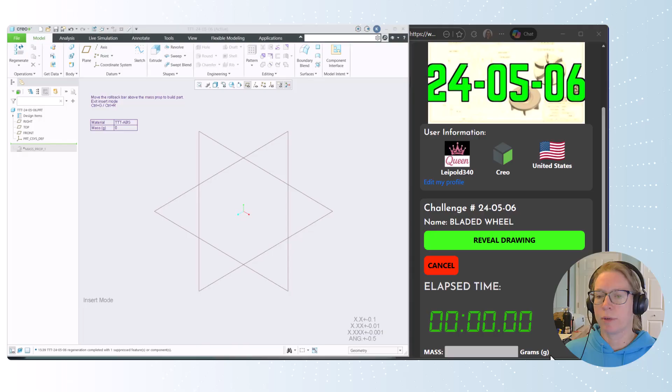All right, good afternoon, and we are here for another Too Tall Toby sample problem. This one is a level 3. We're going to have a pattern. I'm also going to try bringing in a palette sketch that I created, so we'll take a look at that. We are in grams. Let's jump in.

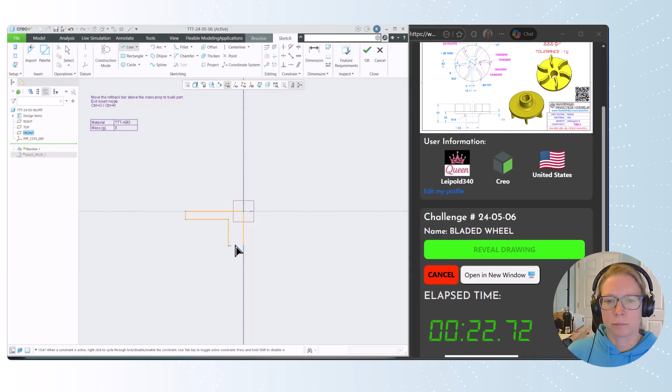I always love a good revolve, so actually let's start this with a revolve. So with revolves, we have to have our center line. I'm going to make the hole separate from this revolve, but my full diameter here is 180. And the thickness here is 11. Lower diameter is 65. And this depth is 55.

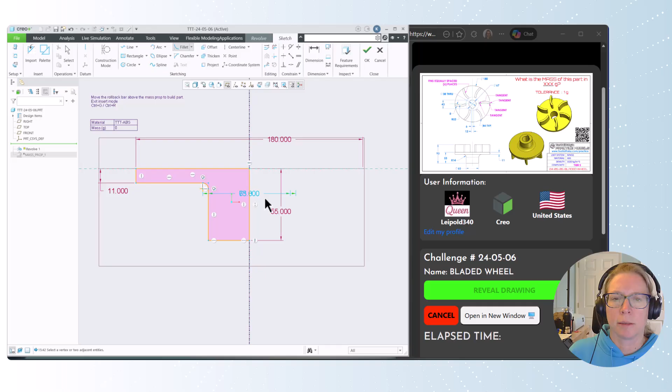So remember, we can't just do this as two rectangles. We've got to have one continuous line on the center for this revolve to work. Oh, let's grab a fillet. Let's click right there and drop a fillet in. And, oh, interesting. Not how I would have dimensioned that. So let's fix it. And that's going to be a radius of 14. We are left with a 65. That's okay.

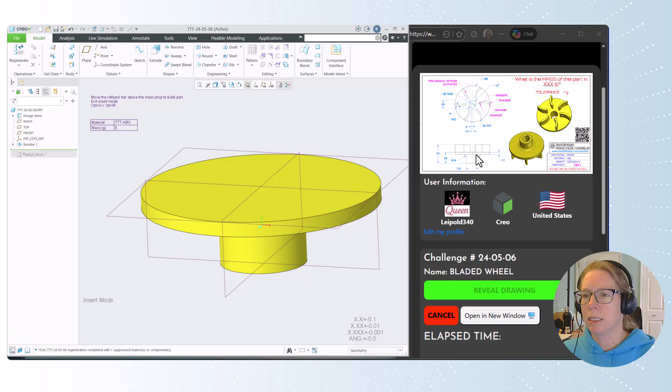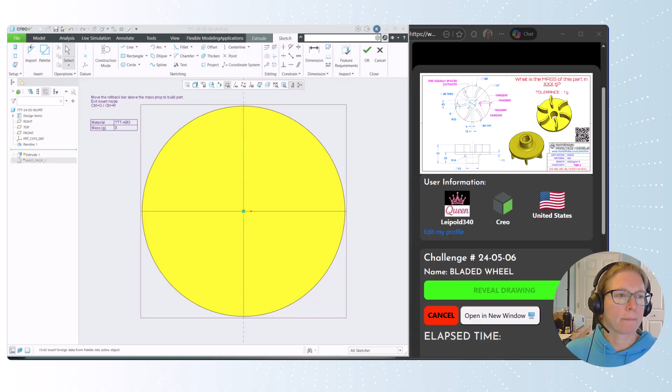All right, so we've got most of our geometry. Let's get those blades on there. So if I look at this from the top, we're going to have an extrude. So let's see what we got in the palette. This racetrack seems like it's going to work for us. So let's drop that in. Let's rotate it. It says that it is going to be tangent to the horizontal, so that's a little different.

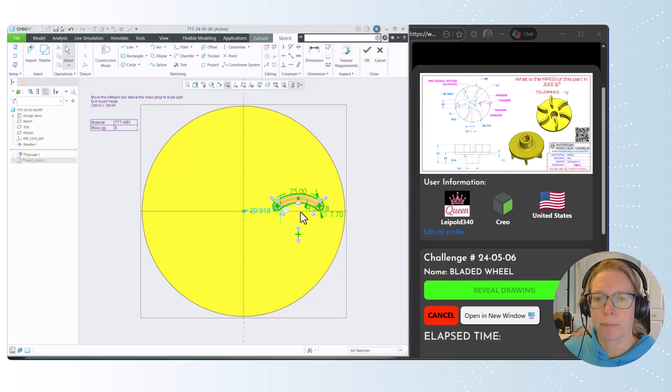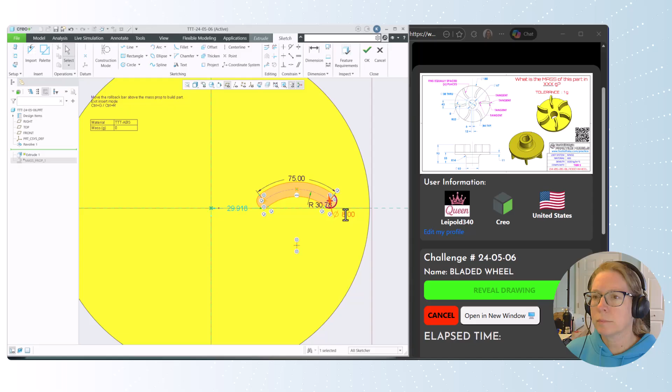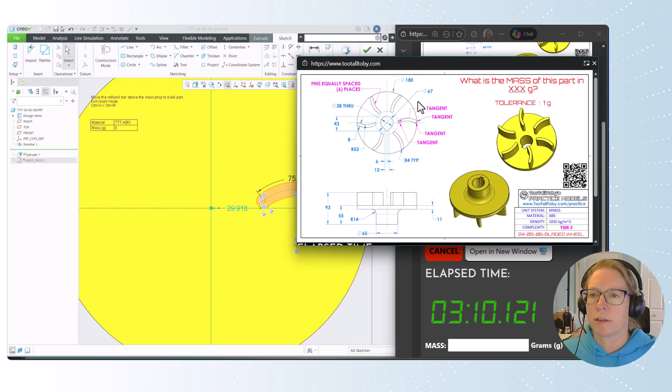Let's see what we can get for our dimensions here. Let's make it tangent here and here. Okay. And we've got our thickness of 8, so that's equivalent to our diameter. I need to zoom in on this a bit. There we go. All right, so the smaller radius is 52. And it hits this diameter of 67. Perfect. We'll slide that over here for now.

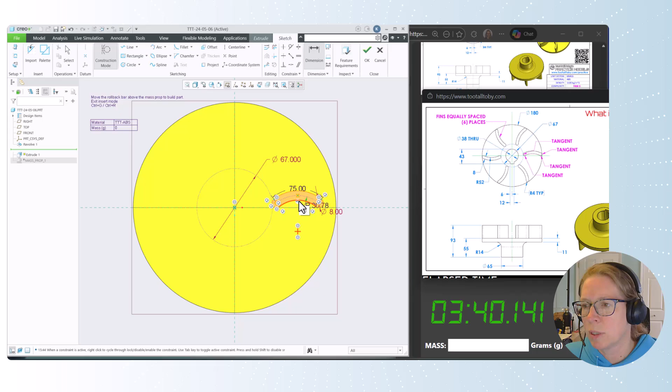So let's get a construction circle. It's tangent. And let's give that a dimension. I'll switch that to a diameter, and that is 67. All right, the other dimension we have is the smaller radius. So we're going to get rid of this one. Smaller radius is 52.

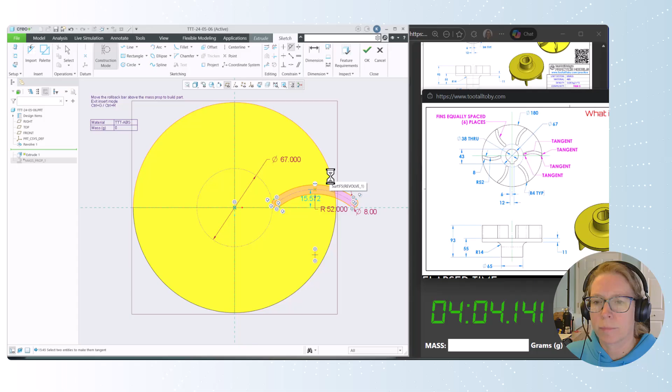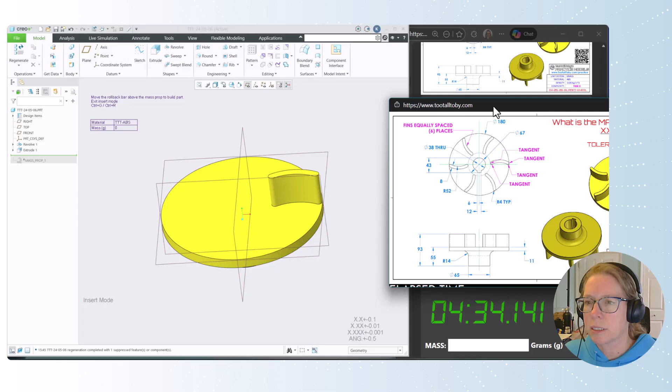Oh, and our last dimension, we're going to get rid of this 75. We're going to make this tangent to the outside. All right, let's see if we can manually drag that in. That'll help. All right. So let's extrude that. And the height of this is going to be 93 minus 55. Okay. I don't see any rounds around that or anything. We'll just do the thickness of 6.

So we're going to grab that extrude, pattern that. Let's go around the axis and select the center line that came from our extrude. Angular extent is the way to go, and we are going to have 6 of those.

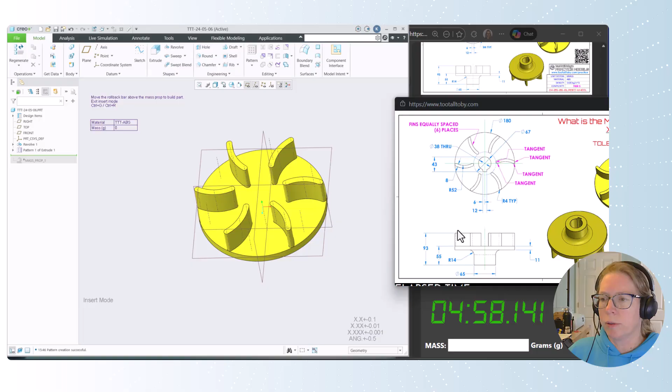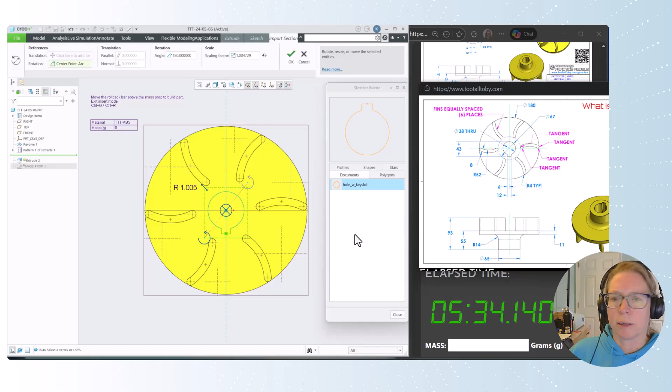All right, so the last thing to do is drop the hole in. And for this hole, I realize that this is a good hole size, and it's something that I might use frequently. So I created a generic hole with a key slot and saved it into my working directory. So technically, based on how it's showing up there, we're going to go upside down. Okay. Put that at the center. All right, let's get some dimensions going here. That looks like it's in the right place.

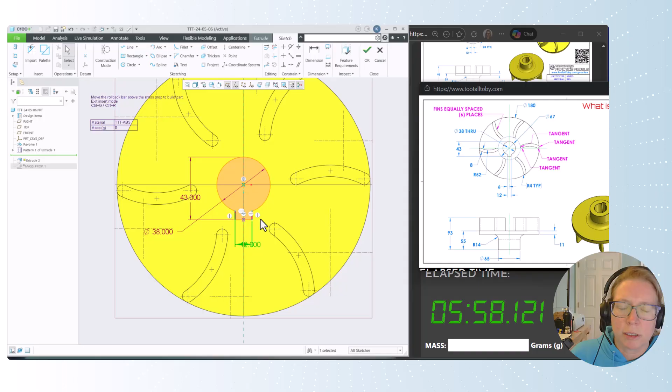So my diameter is 38. My overall height top to bottom is 43. And the width of the slot is 8. So you could do that with a rectangle and a circle. Just make sure that it's symmetric across there. But if you have a sketch that you feel like you're going to use over and over again, all you have to do is hit save while you're in the sketch mode. That'll save the sketch. Just save it in your working directory and it'll pop right up in your palette next time you need to use it.

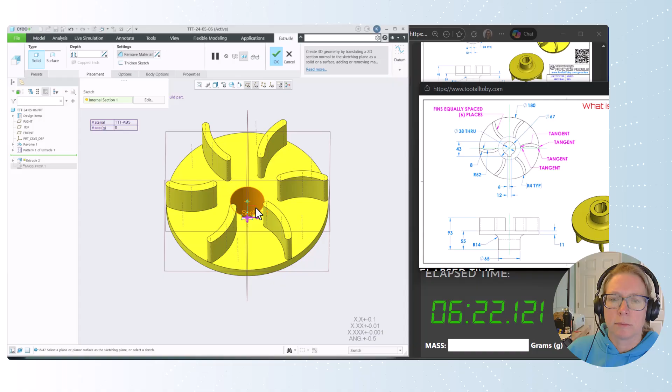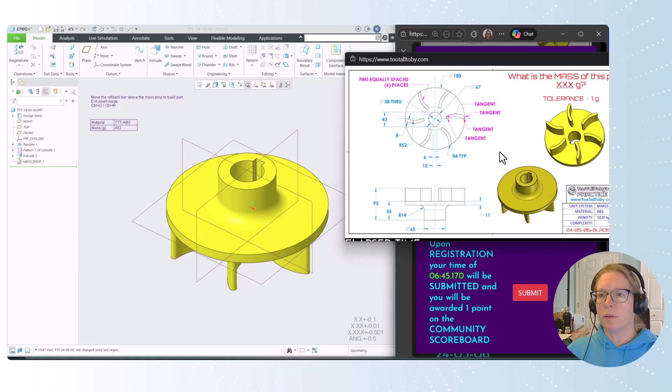All right, so we are going to go through all, removing material. Let's see, how are we looking? I think that's looking pretty good. Looks a lot like what we got. Let's see how we did. Let's try it. Beautiful. All right, so we can close this. So nice part, used a revolve, although it could have been extrudes. Nice big radius there. Let's get that hiding.

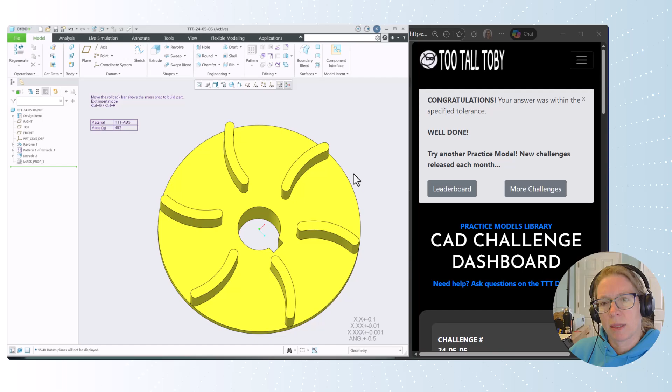So in this case, first time I've used this, but I had my own sketch that I saved into the palette and brought in. For this geometry, let's go back and talk about that one for a second. Right, so I used from the palette tool the arched racetrack with axes. So another way you could do that might be to make some geometry like that. And then with that geometry selected, can we offset that? That only does one side.

So without using the rounded racetrack, honestly, this would be a little bit more challenging. The geometry is pretty straightforward in Onshape. It's called slot, and you would sketch essentially this arc and put a slot around it. We don't have specifically a slot. I was hoping to use thicken, but that's not available. Could offset to either side. You could have the arc and then the circles at both ends, and then use the line tangent option.

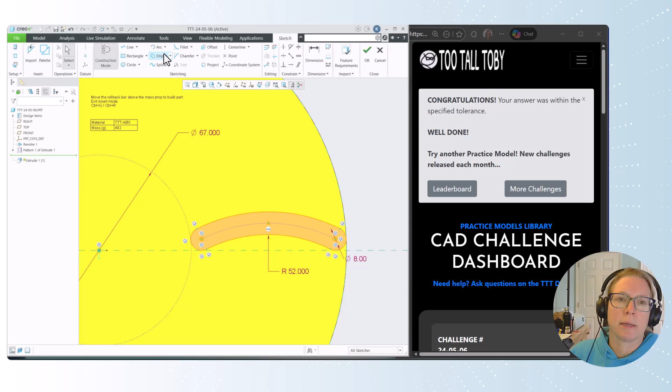No, we don't want that. Sorry. Don't even want 3 tangent. You could probably just do a 3-point tangent arc on the inside and the outside and do a lot of trimming. So that palette tool can really be a big help when you find yourself facing some common geometry, but maybe not exactly straightforward.